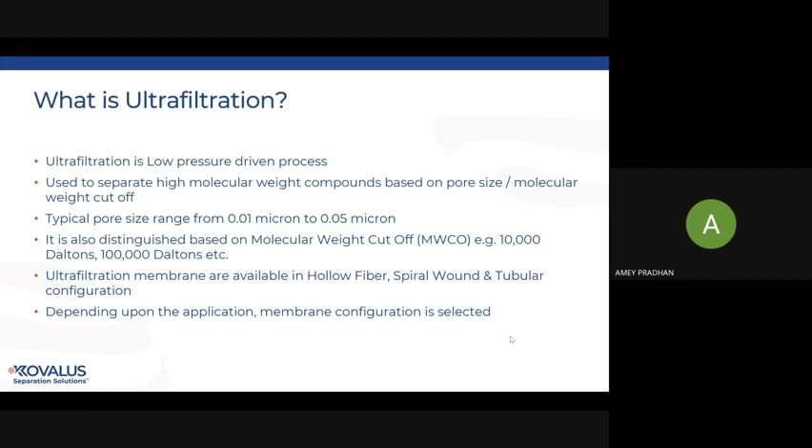So in ultrafiltration membranes, widely there are three types of configurations: tubular, hollow fiber, and spiral. As you can see, the tubular membrane has a bigger flow channel compared to hollow fiber and spiral.

Because of this, the membrane packing density increases from tubular to hollow fiber to spiral membrane, meaning spiral membrane has a higher packing density, so it requires a lesser footprint compared to the tubular and hollow fiber membranes. The concentrate solids also decrease - in tubular membrane, we can concentrate solids to a much higher concentration compared to the spiral wound membrane.

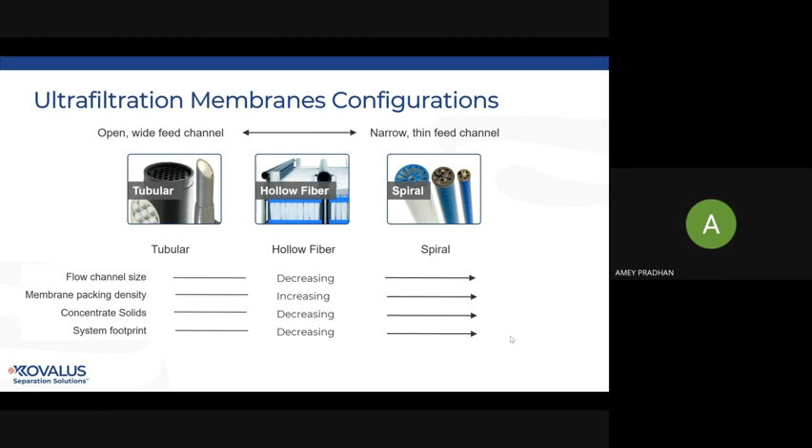So what is submerged UF? Many of you might have heard the term membrane bioreactor, MBR. Is it like an MBR? In a way, it is quite similar to an MBR based on suction rather than pressurized feed. In case of pressurized feed, we have a pressurized UF. Whereas in submerged UF, there is filtration of only solids, and in MBR there's filtration of what we call mixed liquor suspended solids, that is MLSS, or biomass.

In MBR, there is a recirculation - most of the time a constant recirculation of MLSS from the membrane tank to biology happens. Whereas in submerged UF, solids are drained from the membrane tank intermittently so that the solids concentration doesn't increase beyond a certain level in the membrane tank.

In submerged UF, as the name suggests, these membranes are submerged in water or wastewater, and they can be placed in either a civil tank or a fabricated metal tank. But most importantly, since we use it for applications where there is probably an RO in downstream, we would require a proper coating on the tank wall so that no silt particles or cement particles enter the membrane and damage its properties.

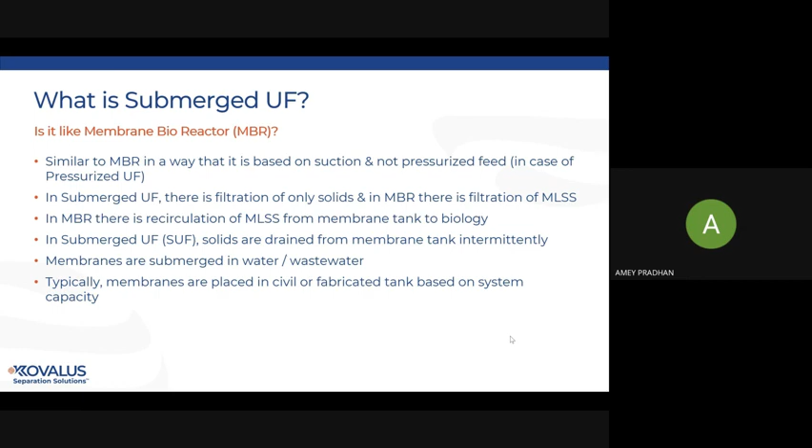So what has basically changed from an MBR membrane module to a submerged UF membrane module? In MBR membrane module, typically you will have a gap between the membrane hollow fibers, whereas in submerged UF module there will be less gap - the packing density will be much higher. The same module frames are typically used.

It reduces the choking capability because in submerged UF we are only treating the solids, not the MLSS, which can be in the range of 10,000 to 12,000 milligrams per liter. Whereas in submerged UF, the solids can be in the range of 100 to 200 ppm, and in the submerged UF tank it can be concentrated to around 1,000 to 2,000 milligrams per liter. So a slight tweak in the membrane module design is all that is required compared to an MBR membrane module to a submerged UF module.

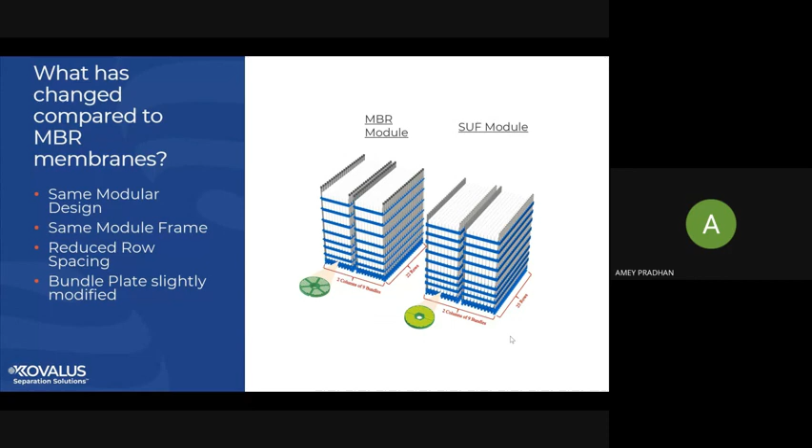So what are the typical applications of submerged UF? Wherever, in principle, pressurized UF can be used, submerged UF will find its application there - be it tertiary treatment where we can position it for tough-to-treat waters, where the secondary clarifier is not working effectively, there is an upset in the secondary clarifier, or there's sludge carryover or small biomass carryover going to downstream equipment. This submerged UF can handle that.

It can also be used in surface water where there is high TOC loading or turbidity spikes, specifically sometimes in river water applications, or for TOC or color removal in surface water, which can be treated with some coagulant dosing. It can also be used for iron or manganese removal if the water has a high content of iron or manganese - with the help of an oxidant, we convert the dissolved form of iron or manganese to a suspended form, and the submerged ultrafiltration will filter based on pore size and molecular weight cutoff.

And the most common application is RO pre-treatment. Since this is an ultrafiltration membrane used in submerged UF, it can give you an SDI less than 3 on a continuous basis, and it can also be used for seawater desalination.

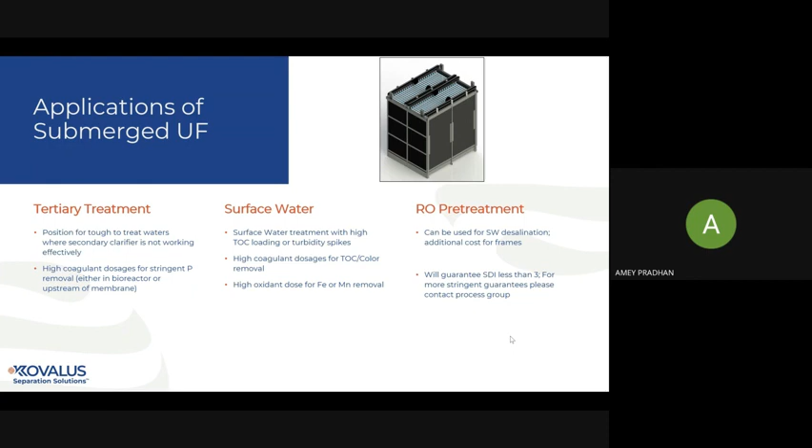So what does KSS offer in Puron in submerged UF? We call it Puron HF. It's a high flow membrane module, available in different configurations: 480 meter square, 960 meter square, and 2650 meter square.

Based on various flow rates, different modules can be selected, and arranged in a single tank or multiple tanks depending upon the redundancy required by the end user. It can be 1 into 100%, 2 into 50%, or 4 into 25% configuration—whichever is required, with multiple membranes arranged in a single tank or across different tanks to have redundancy.

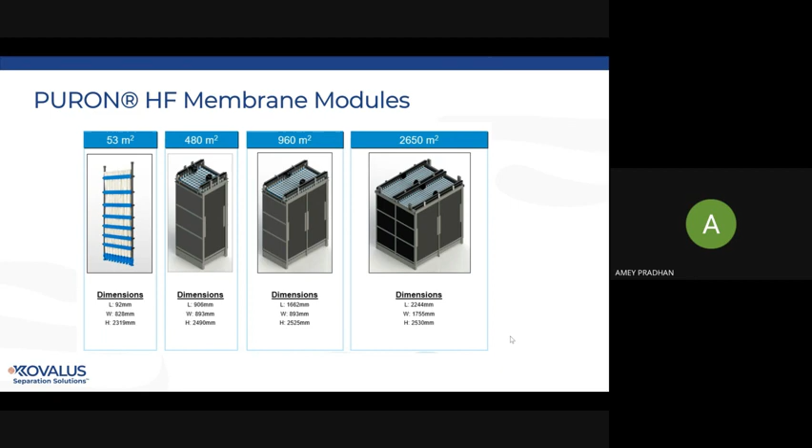So what does the Puron HF have? It is basically a single header membrane module that is used in the Puron HF module. Here we have the single potted membrane.

It's a hollow fiber membrane which is potted only from the bottom of the membrane, and free at the top, which is sealed at the top end so that there is no solids entrance into the membrane fibers. These membranes are operated in outside-in mode, and have a braid inside, a reinforcement which gives strength to the membrane.

This is similar to a membrane bioreactor where the membrane is used at a very high solids concentration. In submerged UF also, there can be certain spikes sometimes in river water or surface water, or tertiary treated water where the secondary clarifier is not functioning properly.

So this braid or reinforcement gives strength to the membrane, and since this is an ultrafiltration membrane, it rejects bacteria, colloidal solids, and suspended solids—only treated water with turbidity less than 0.5 NTU passes through the submerged ultrafiltration membranes.

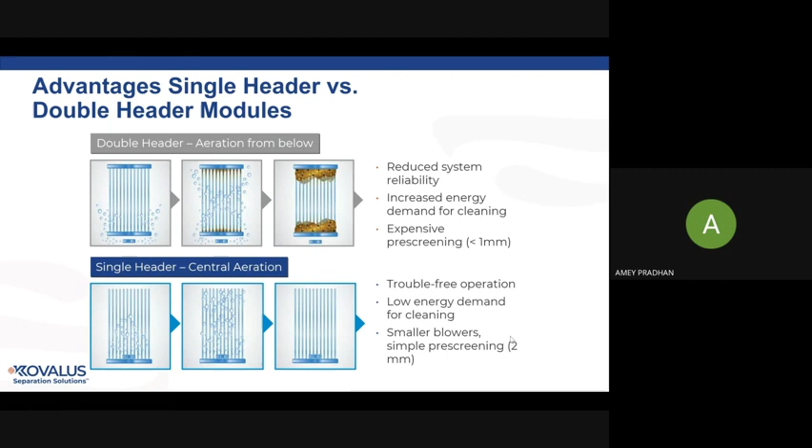There are different types of membranes in hollow fiber configuration available. There can be double header membranes, which are potted from bottom as well as top. What KSS uses is a single header and central aeration technology, as I just briefly touched upon. Due to this, we can have pre-screening of probably 2 mm for the submerged ultrafiltration membrane, so that we don't want any large particles going into the membrane tanks.

So how does this membrane system operate? It can operate in a dead end mode, or it can operate in feed and bleed mode.

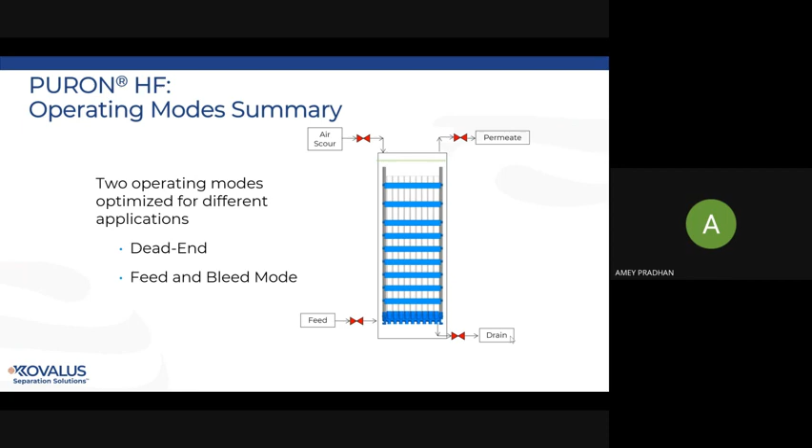What are the different steps in a submerged ultrafiltration system? Mainly there is filtration and backflush or backwash. In backflush, there can be various steps like pre-aeration, and the actual backwash with treated water, then post-aeration, just to clean the membranes so that whatever suspended solids accumulated in the fiber bundles can be cleaned.

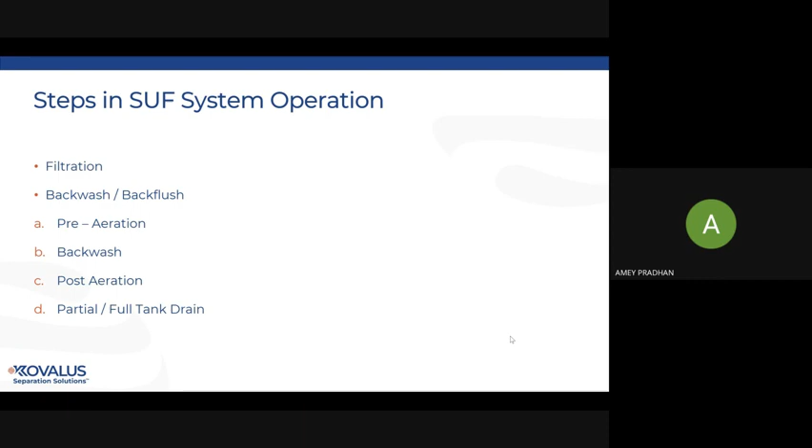And then partial or full tank drain, depending upon the solids concentration in the submerged UF tank. Because when operating in dead end mode, after every cycle of filtration, the solid level in the submerged UF tank will increase. So we want to control that level, which should not go beyond say 1,000 milligrams per liter or 2,000 milligrams per liter. Once it reaches that level, there is a tank drain—it can be 5% or 10% of overall volume, or a complete tank drain.

Unlike other membranes, this requires chemical cleaning as well. It is maintenance cleaning with sodium hypochlorite, and the other chemical is citric acid.

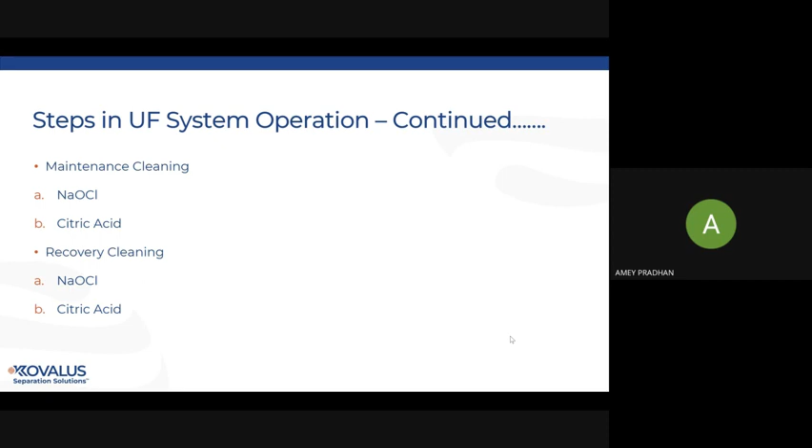Sometimes HCl, hydrochloric acid, or H2SO4 can also be added. There is a more rigorous cleaning called recovery cleaning. In filtration, we do suction with the help of the permeate pump, and filtration steps can vary from 20 to 45 minutes based on the feed TSS.

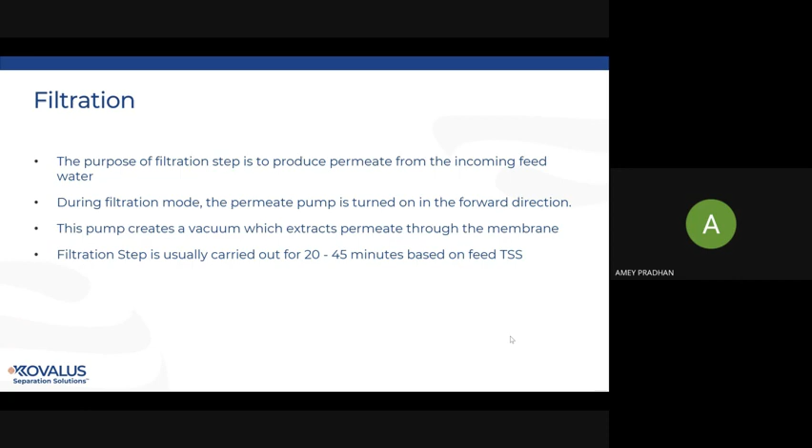Then comes the backwash. In backwash, there is a pre-aeration step to loosen the suspended solids attached to the membrane fibers, followed by the actual backwash, where a small quantity of water is used for backflushing, similar to pressurized ultrafiltration membrane. This is followed by post-aeration and a partial or full membrane tank drain, based on the suspended solids concentration.

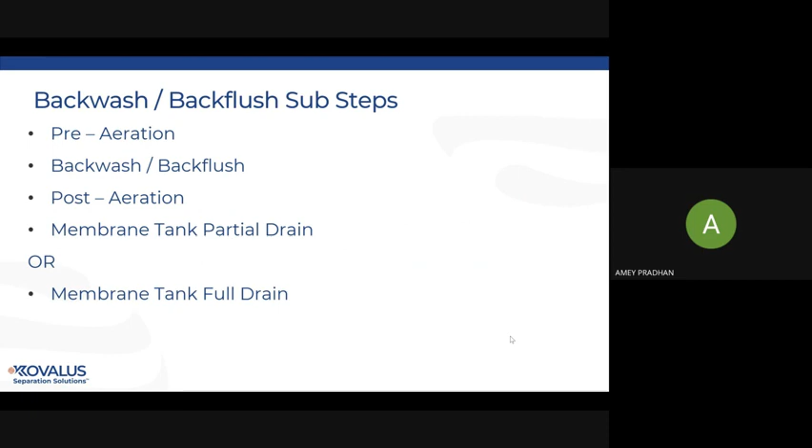Backwash can range from 30 to 60 seconds. In backwash, water flows in the reverse direction compared to the filtration cycle, from inside out, and it restores the baseline transmembrane pressure.

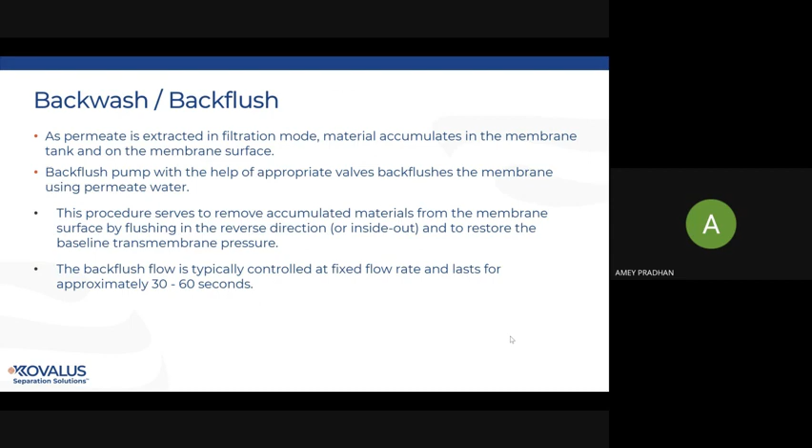Aeration again is through the coarse bubble nozzle located in the center of each fiber bundle. It removes any suspended solids or foreign particles trapped between the fiber bundles, cleans the membrane fibers, and helps restore the transmembrane pressure, keeping the membrane clean.

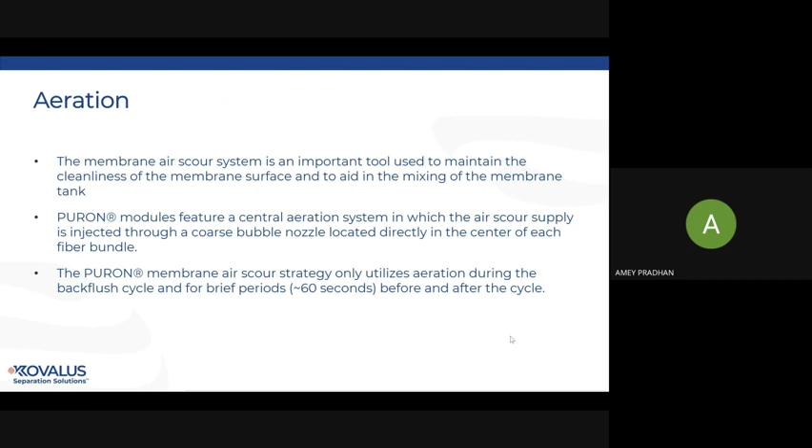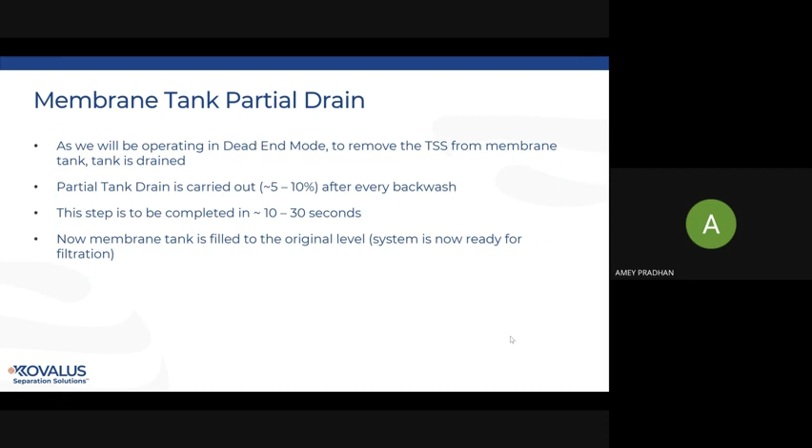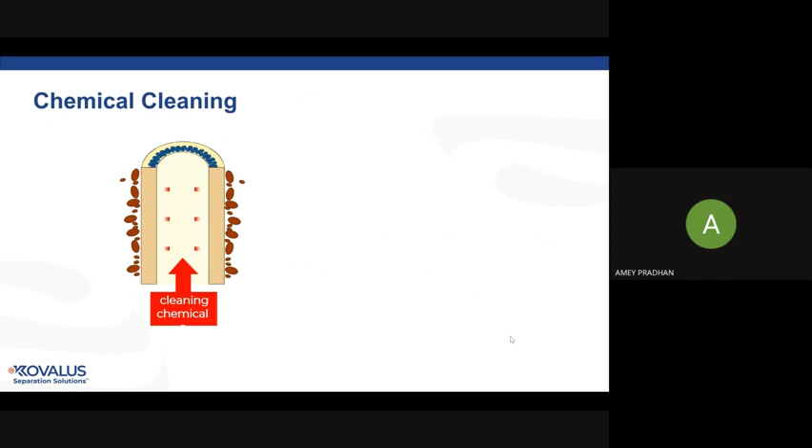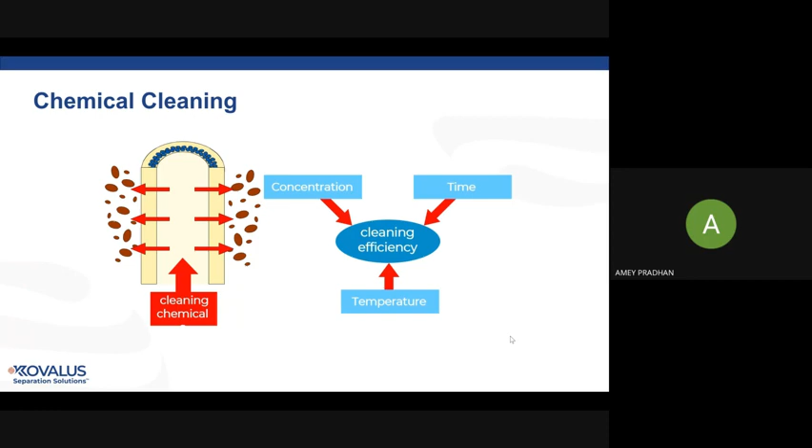This is typical chemical cleaning where chemicals are introduced from inside the membrane fibers, removing suspended solids attached to the outside walls of the fibers. Cleaning efficiency, like any other membrane technology, depends on water temperature, the chemical used for cleaning, its concentration, and the soaking time for membrane cleaning.

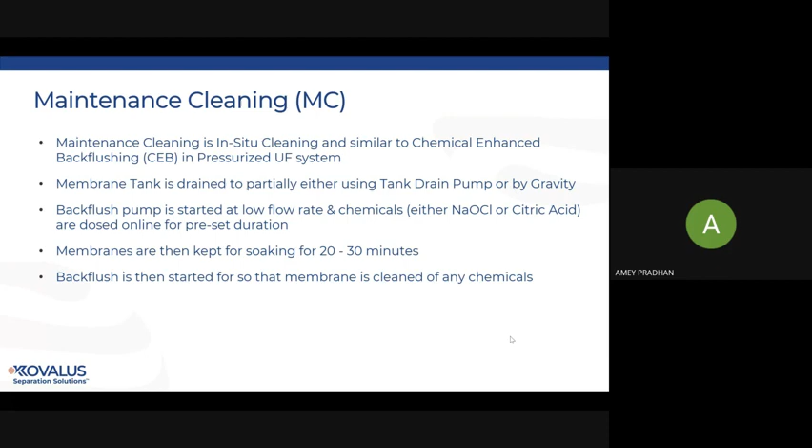Maintenance cleaning is typically done once a day with sodium hypochlorite and maybe citric acid in a preset duration. It takes around 20 to 30 minutes a day.

Recovery cleaning is more rigorous. It typically happens once every 3 or 4 months for effluent treated water, or for surface water, once every 6 to 8 months.

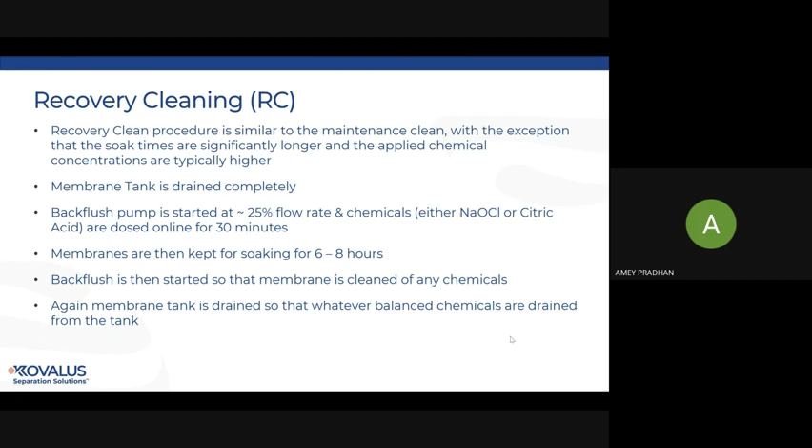So in summary, what is submerged UF versus pressurized UF? Broadly, submerged UF can handle higher TSS because it is submerged and is an open membrane, so we can clean the membranes physically. Pressurized UF is enclosed in a housing pressure vessel, so it can only be cleaned chemically. Submerged UF can handle higher TSS because of higher packing density compared to pressurized UF, requires a smaller footprint, and has lower energy consumption since it can be fed directly by gravity from an upstream clarifier.

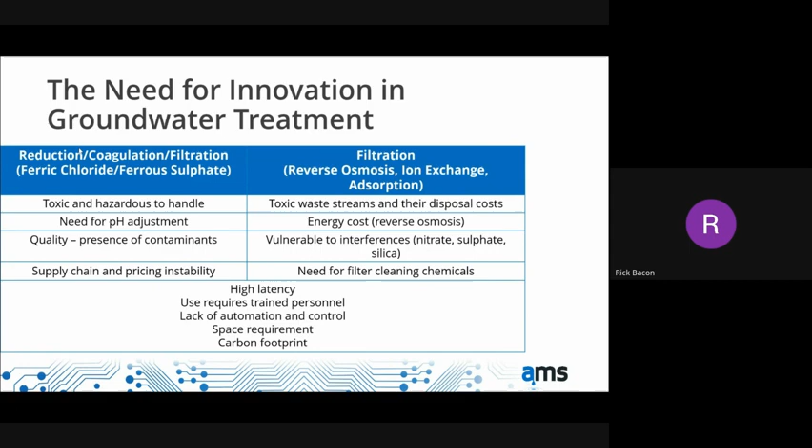Both systems have high latency, which is important where you have stop-go wells. It takes time for these systems to come back into equilibrium. You definitely need trained personnel, and generally these systems are not heavily automated. Because of the energy intensity of either transporting chemicals or electricity use for reverse osmosis, they have substantial carbon footprints.

Electrocoagulation has been talked about as a way of treating arsenic. It has its applications, but it's limited technically for a number of reasons I won't spend time on here. Suffice to say it's not really suitable for drinking water applications, largely because of the need to maintain the electrodes in pristine condition. Otherwise, there's a risk of producing toxic byproducts, and it's very difficult to control the pH of the process, which in the case of arsenic is essential to achieve maximum removal levels.

Our system looks similar to electrocoagulation in that we're taking the influent from a well, but in this case we take less than 1% of the actual produced water and run it through a generator into which we dissolve, electrolytically under very tightly controlled conditions, ferrous reagent. That ferrous is converted to ferric, and before injecting into the contactor we can adjust the pH in order to get optimal removal of arsenic.

Then we follow the standard coagulation and filtration process, and the whole system is monitored both on the influent and the effluent by an online total arsenic analyzer. So we have total control of the process. It has very low latency, and we achieve very high levels of arsenic removal, far more effectively than the alternative technologies.

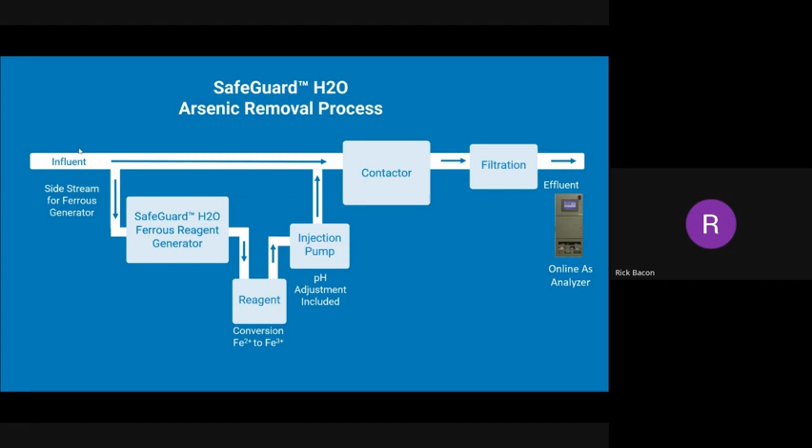This electrolytic process is driven by Faraday's law. We know that depending on the amount of current we provide to the electrodes, we will produce a given amount of ferrous, which in time will oxidize to produce a coagulant or adsorbent.

It's very compact, it's in situ, and very economic in terms of power use. So this can be operated with renewable energy sources, and the ferrous, if required, can be stored and used at a later date. So when renewables are not available, or off-peak electricity is not available, that stored chemistry can be used essentially as a battery of those energy sources.

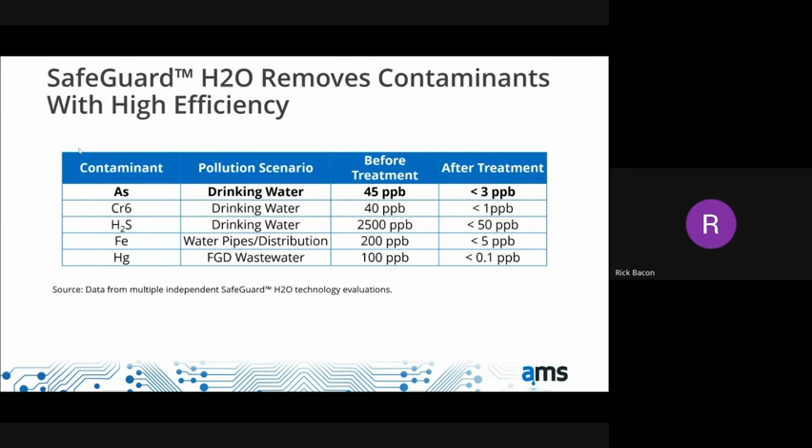The reason for that is because silica is a co-contaminant that impairs the use of other approaches, like ferric, ion exchange, or even electrocoagulation.

The interesting thing is why we were able to get to below 3 ppb with the on-site generation system - that's because we were able to control the pH. It's impossible to control pH where you're either using ferric chloride or electrocoagulation. It's very possible for us because we're dealing with a side stream with a very small amount of flow through, and therefore we can adjust very tightly the pH. That enables us to operate under optimal conditions and therefore reduce arsenic to 3 ppb.

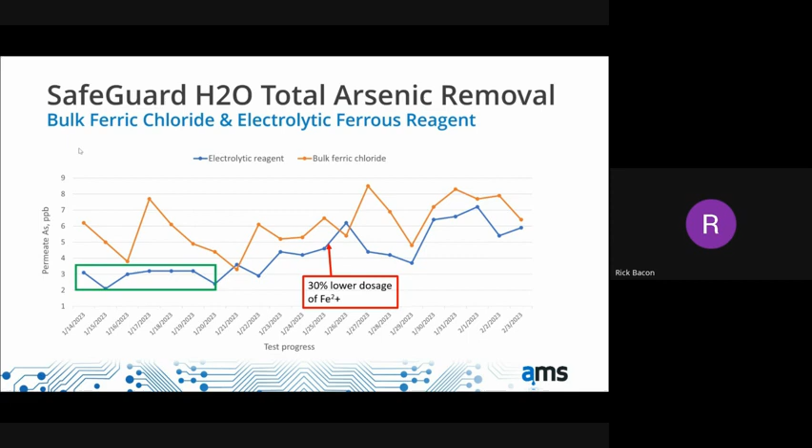Overall, the efficiency of the system is also greater than bulk ferric chloride. On average, we dosed 30% less than the comparable amount of ferric chloride. That produces a number of benefits: firstly, you're using less; secondly, you're producing less sludge; and there's far lower risk of iron carryover after filtration.

One of the unknown facts about ferric chloride is, well firstly, how it's produced. In general, in most parts of the world, it's produced by dissolving scrap metal in waste industrial acid. And it's very worthwhile looking at the actual chemistry of ferric chloride that's bought in bulk. One of the most surprising results of our research, which we repeated this on a number of sites, is the presence of manganese.

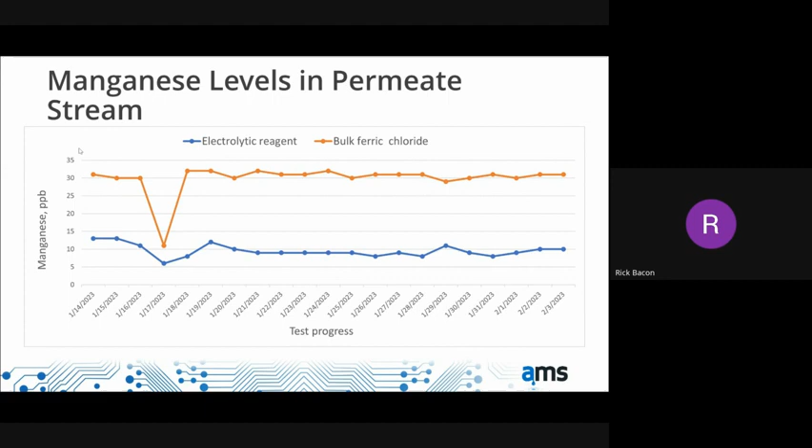This is showing again the bulk ferric chloride had a presence of around about 30 ppb, which is getting very, very close to the proposed EPA limit for that contaminant. For on-site generated ferrous, we were using certified steel, so virgin steel with very, very low manganese levels. So we're not introducing a contaminant into the drinking water through the use of this remediation method.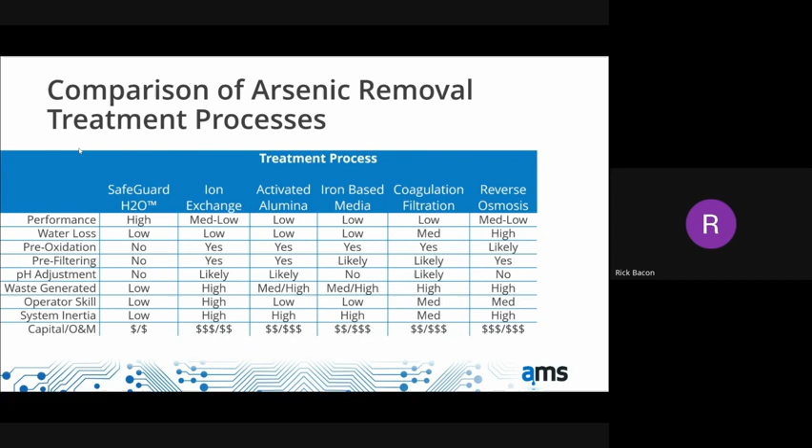So wide range of benefits from the use of this system: substantially lower lifetime costs, fully automated. The precursor is of control quality, certified, which would not be the case with ferric chloride. It does not produce toxic waste streams, and we have very low process water loss. It eliminates the need for transporting, delivering, and storing toxic chemicals.

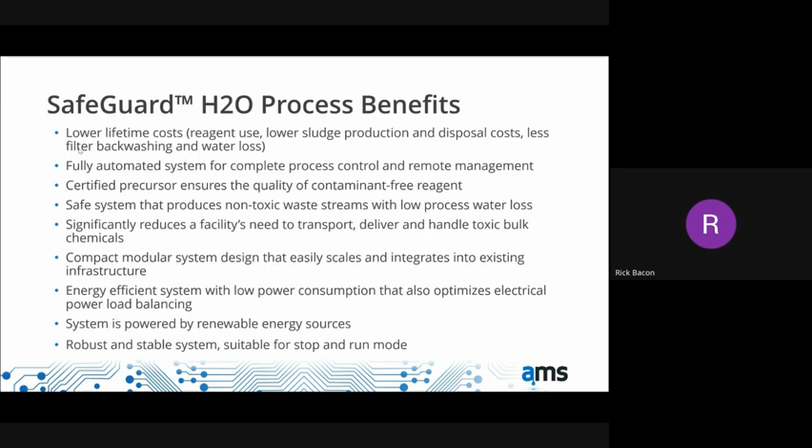It can be easily scaled up to plants of substantial volume, or scaled down to small treatment plants. It's highly efficient, so we can use renewable energies, and it's very robust and suitable for stop-run mode. It has been demonstrated in the US to be a very effective system, and several systems are now in the process of design and implementation. Thank you very much indeed.

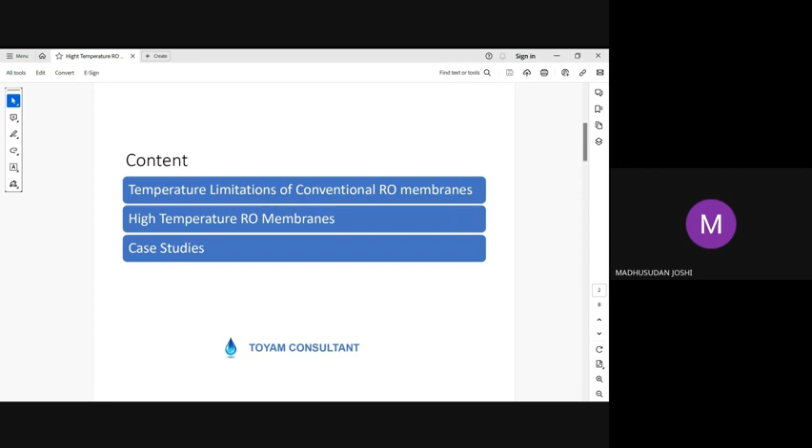Next slide, please. A typical temperature allowed for a conventional RO membrane is 45 degrees centigrade. Actually, the limit is for both temperature and pressure, because temperature and pressure together affect the RO membrane. Let us understand what is the effect of temperature and pressure on various parts of RO.

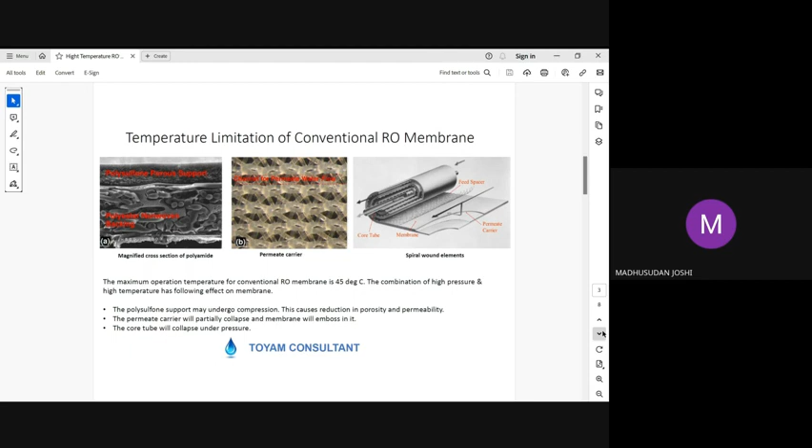And the third effect is on the core tube. You can see that the core tube has high salinity feed water on the outside, while low salinity permeate at low pressure is inside. So when this core tube is subjected to high temperature and pressure, it collapses and the membrane gets damaged. Due to these three reasons, there is a limit on temperature given by all the membrane manufacturers, which we have seen is 45 degrees centigrade. Next slide, please.

The operation of temperature and pressure are inversely proportional. This means when operating at a higher temperature of 80 degrees centigrade, my operating pressure cannot be more than 20 bar. And if operating at a temperature of say 60 degrees centigrade, my operating pressure can go up to 50 bar. So depending on my operating temperature, the limit on operating pressure is also set.

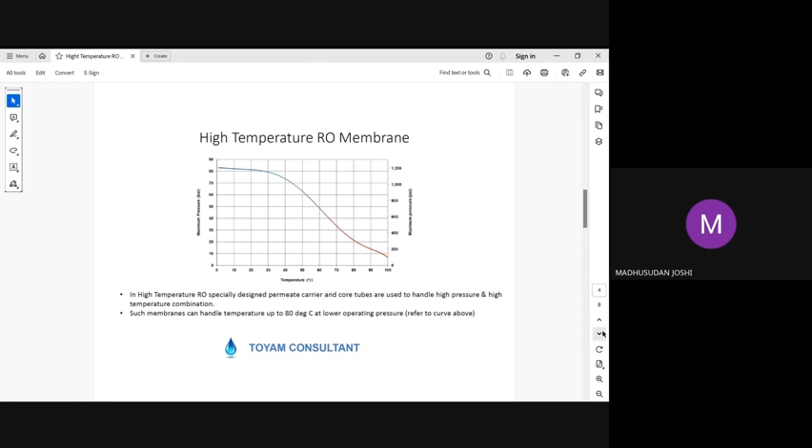Now I am taking you through some real life case studies. The first case study is in the oil and gas industry. There are types of crude oils which are difficult to extract. For such oils, steam is used. There is a method called SAGD, steam assisted gravity drainage, in which steam is injected inside the earth, and the crude oil viscosity reduces, and a mixture of hot water and oil flows out. After oil is separated, the oily water that remains is called produced water. It is at a higher temperature of 85 degrees centigrade.

No, one before this. I think anyway, you are not putting the latest presentation.

In the treatment of produced water, first it is treated by electrocoagulation. Then it is passed through a ceramic UF, because normal UF cannot handle the temperature of 85 degrees centigrade. This is followed by a 2-pass high temperature RO, which produces a permeate good enough to put into a boiler. And the steam generated is reused back for crude oil extraction.

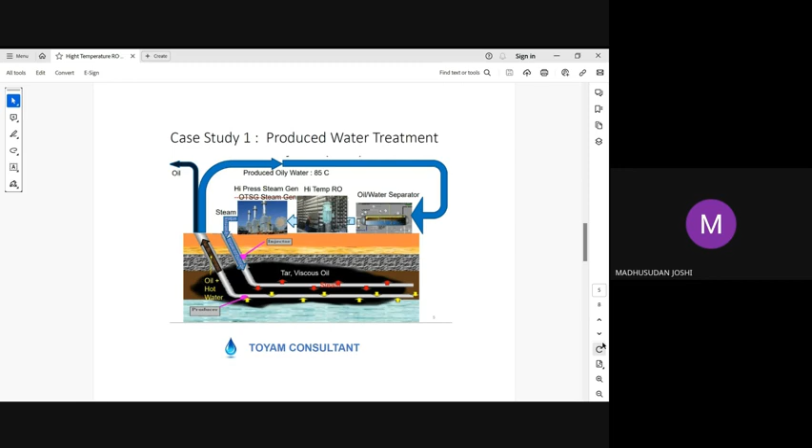The second case study is about recycling of laundry wastewater. Laundry wastewater recycle is not a new application. A typical system uses wastewater at a temperature of 50 to 60 degrees centigrade coming out from a laundry. It is cooled and then treated in UF and RO. However, with the invention of high temperature RO membranes, you are not required to cool that water now. This water can be directly treated in reverse osmosis, and about 75% of the water can be recycled back into the laundry. So you are not only recycling back the water, you are recycling back the energy also, because the permeate coming out of the RO is at high temperature.

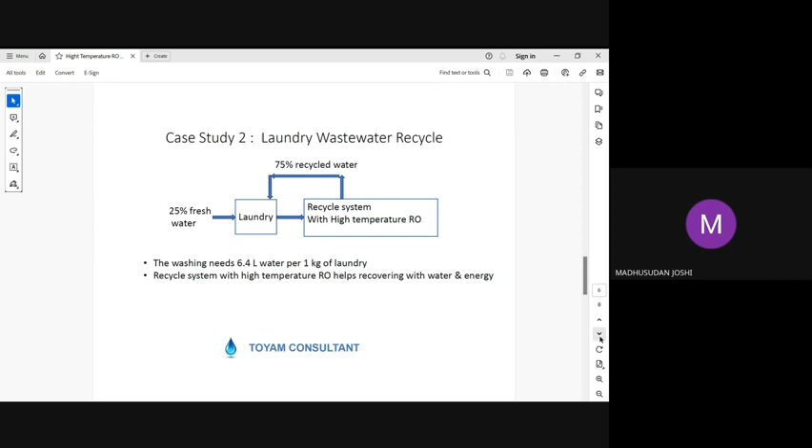The third case study is in the biodiesel industry. This type of application can be used in any industry where the last step in manufacturing is an evaporator. In a biodiesel industry, the evaporator contains glycerin, and this glycerin gives a load on the biological treatment because it is high on COD. So this evaporator condensate was treated with a high temperature RO. The RO concentrate, which is high on organics, is recycled back to the evaporator, and the permeate, which is low on organics, was used in other process areas in the same industry. So this way, not only is the glycerin recovered, but also the water which was going into biological treatment is saved, and the load on the biological system is also reduced.

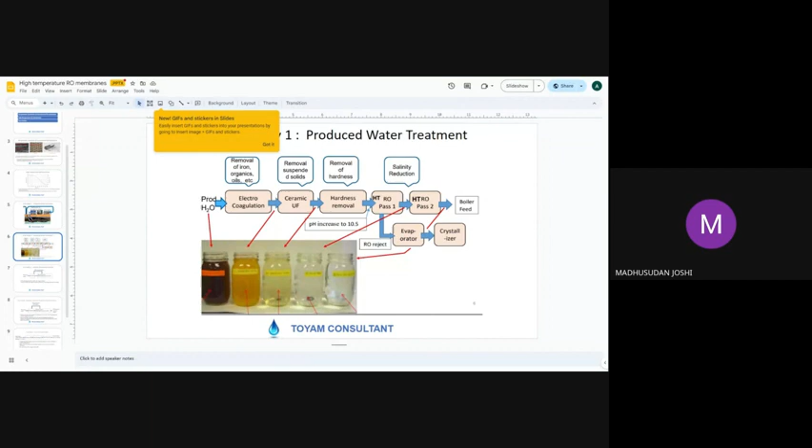You can go to the last slide. Yeah, yeah.

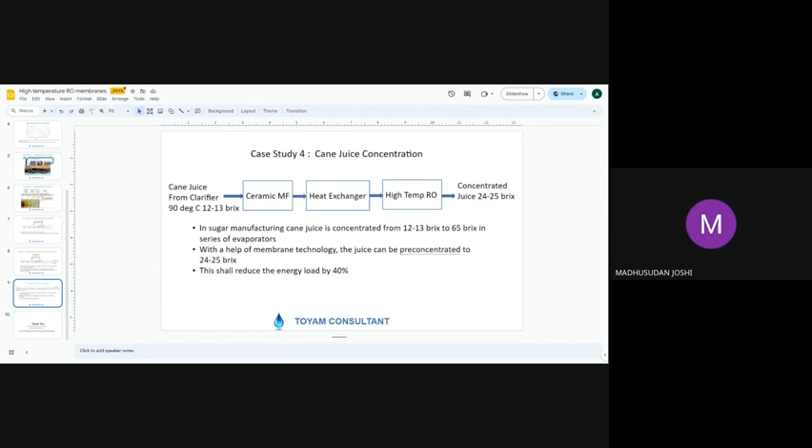So in a sugar industry, the cane juice has 12 to 13% sugar, and in the manufacturing, this juice is concentrated to 65% with the help of evaporators. However, the load of evaporation can be reduced if RO is used as a first step of pre-concentration. The typical scheme is: in sugar industry there are clarifiers which operate at a temperature of 90 to 100 degrees centigrade. This hot cane juice is first treated in a ceramic MF to remove suspended solids and waxes. Then it is taken to a heat exchanger to cool down to 70 degrees centigrade. And then it is fed to a high temperature RO, which concentrates the juice from 12 to 13 brix to 24 to 25 brix. This way, about 40% of the load on the evaporator is reduced.

Yeah, that was the missing presentation slide. Thank you.